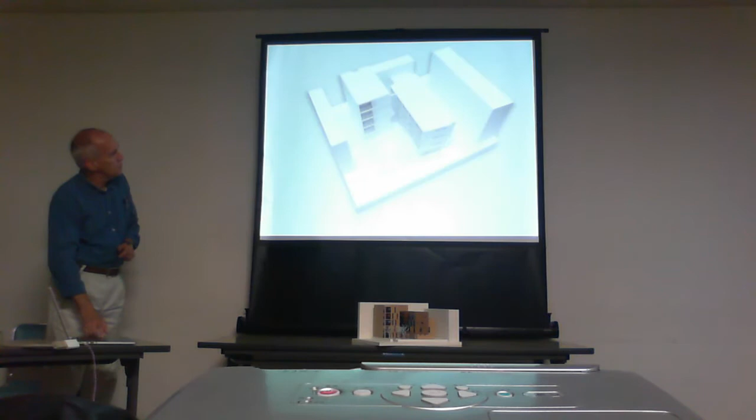I think what is good about this photograph is that it shows the basic moves to the design that support those two ideas of connection to nature and connection to the community.

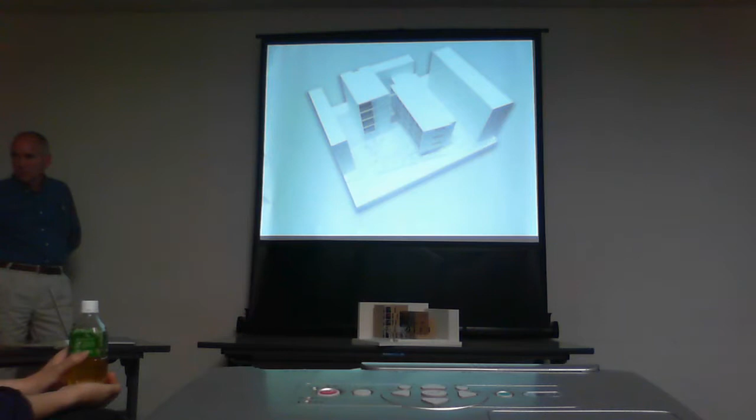After we did those basic moves, in terms of the way we thought about the detail of the building and how the building looks, we wanted the elevations, the fronts of the building, to be very stick-like, to have many pieces, so that when you walk by on the street and look at this, you would look at it through the trees.

The sort of parts and pieces of the building would sort of blend in with the branches of the trees, so that the scale, the size of the building breaks down just as the size of the tree breaks down because of all of the branches, so that everything sort of becomes blended together, and where the landscape ends and the building begins is kind of blurred.

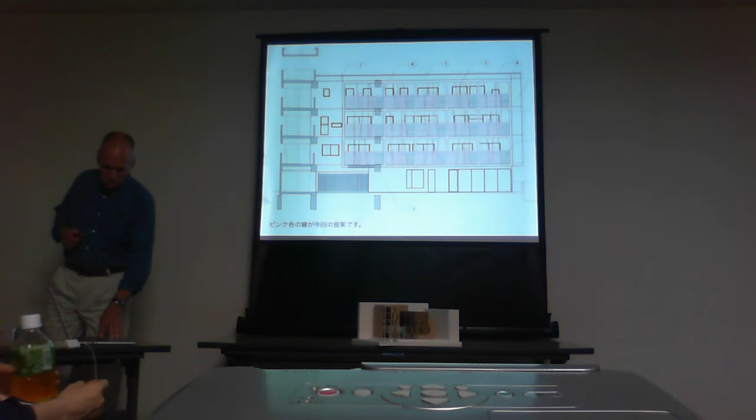I think we'll do one little detail. Before we go to that, there's one little detail I did want to mention on the railings. I think it gives you an example of how we're thinking about the details to follow through on the special quality of the building.

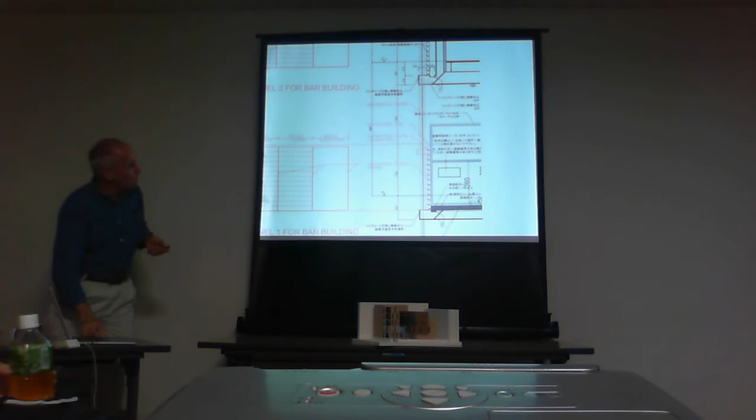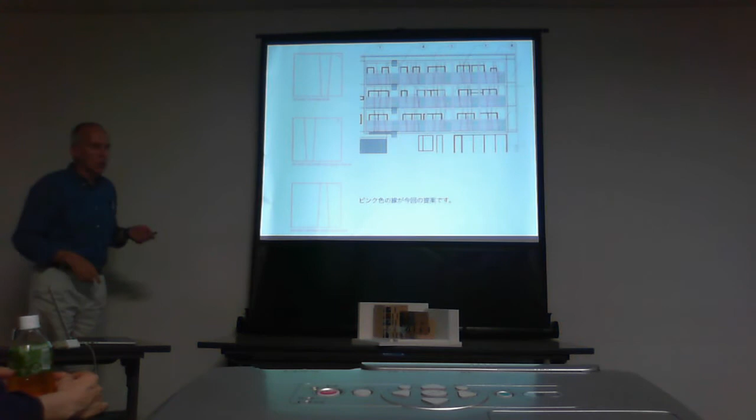On the louvers for the railings, we've designed them so they're very stick-like, but they conceal everything behind them, so on the elevations you can hang your laundry on racks, keep things on your balcony, and it won't be seen from the street. The way the louvers are angled blocks the view but still lets air come through, so from the garden your view won't be ruined by seeing laundry or stored things on people's balconies. I just wanted to point that out.

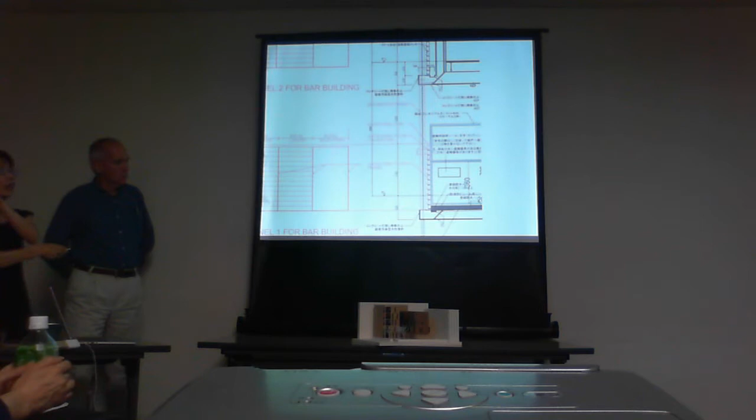So, there's one more small history lesson. There's another tradition that we brought into the building. As I was saying, we translated the building from an idea of exposed concrete to now being concrete with a color stucco over it. I think what's important is that this isn't an idea that simply came from nowhere. It came from a logic and understanding about a certain tradition and way of building, and in particular, a man who was very important in the history of modern architecture for Europe, and that importance came from his experience in Japan. And then I'll explain his connection with Gropius.

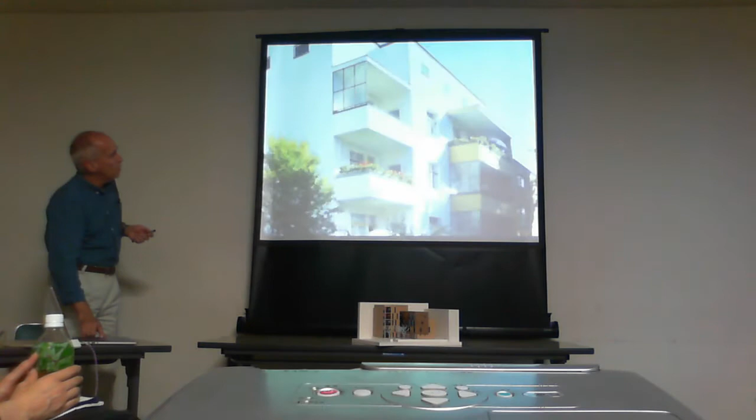Sometimes he used color in very simple, quiet ways, and other times in a very bright way. But the other interesting thing about his use of color is that he found colors he could connect to nature. So the colors aren't fashionable or trendy—they don't make you tired of them after five years. They have a timeless quality, and they're connected to the landscape. The way the building's color fits so well with the landscape really interested us, and we wanted to pull that idea into your building.

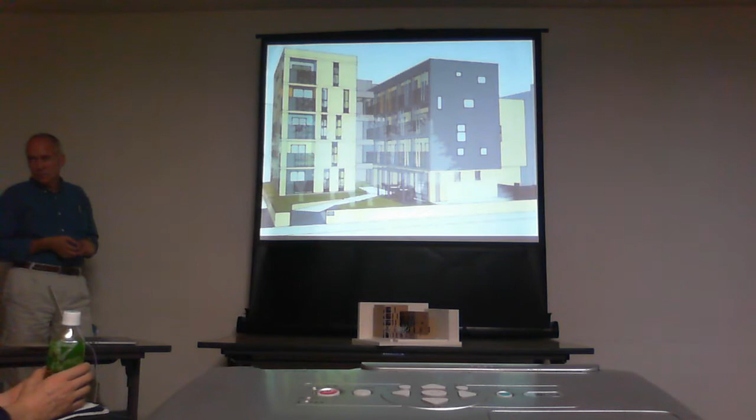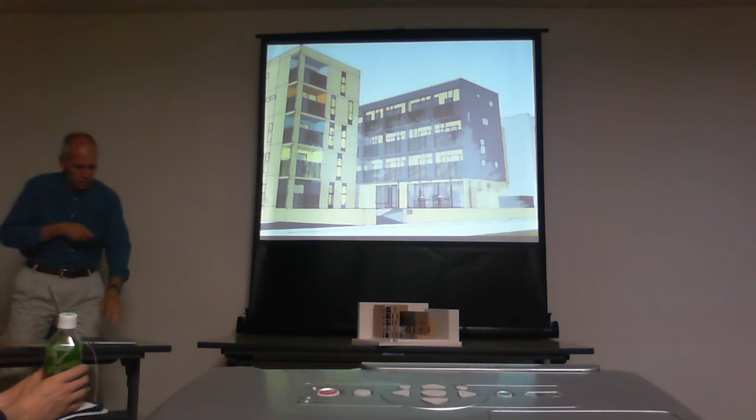Then the next thing we did was where we carve into this building for the units, we apply a palette of color within that spot—that's the color move on this portion of the building. On the next piece, we apply those same colors on the panels that sit on the balconies, and just as each of these colors identifies an owner within there, these colors correspond to the unit behind. That's how you get the mix of color.

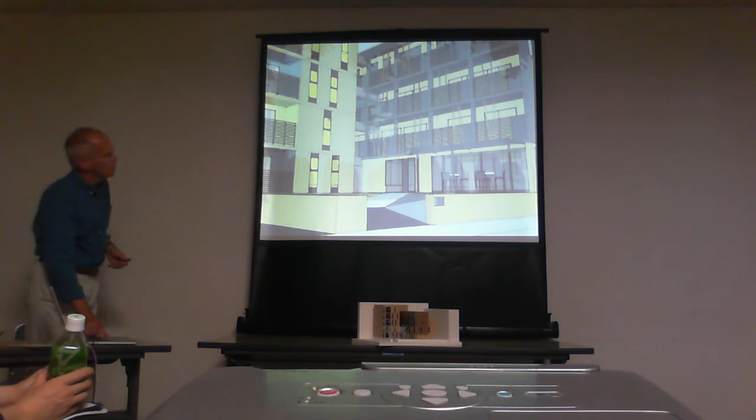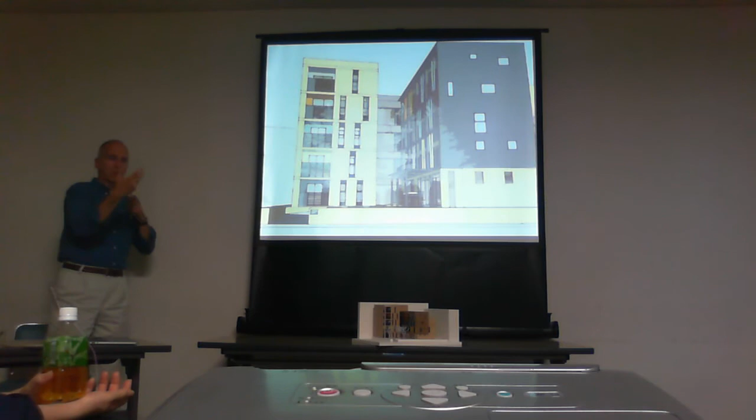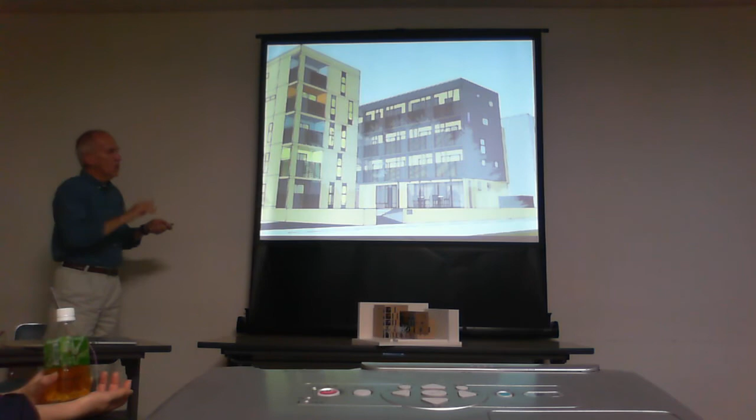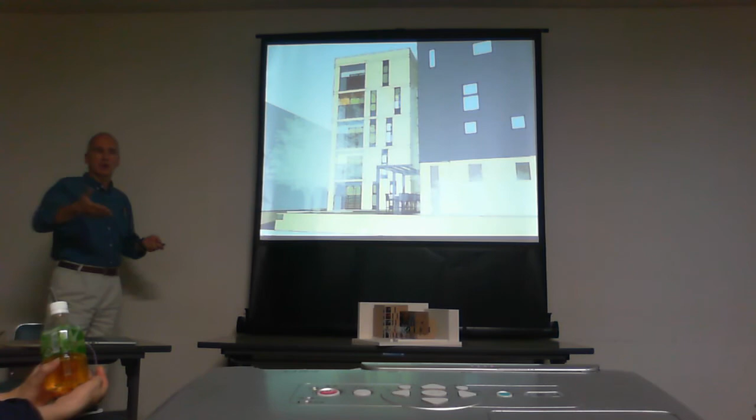The other thing about how we wanted to use color was that the more you move by the building, the more you understand it—you don't stand in one place and understand the entire building, but as you walk down the street, it changes as you go by. When I'm walking this way, I see these colors strongly, but not those. As I continue to walk, suddenly those colors come out as I look straight on. Then around the corner, the most important piece, in my opinion, is that you see the living room and the patio right at the street—that sense of community, greeting everyone who walks by.

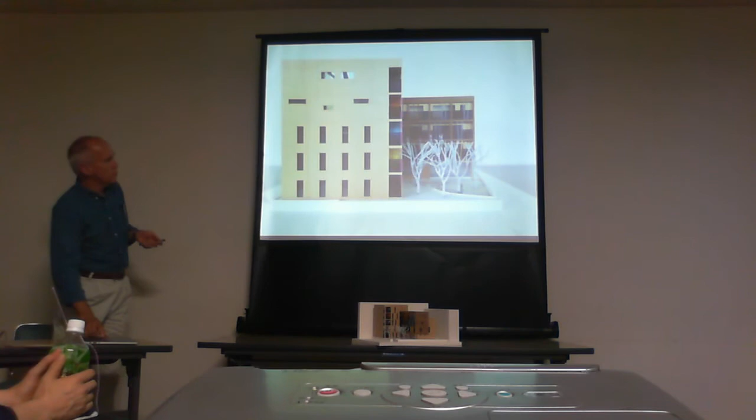So these are some photographs of the model itself. I think the colors read better on the model than in the computer renderings—more accurate. We wanted to show you these photographs to give some sense of the idea, so that as I walk down the street and look here, I see this elegant statement of color playing off the landscape.

One thing that's very important that we'll continue to work on is refining the actual tone of each color, because it's important that the color be timeless, so that after 5 or 10 years you can still look at these colors and find them pleasing—not colors that were fashionable in 2014 and suddenly unfashionable in 2020. It's also important that they work well with the landscape, like those examples with blue and powder, so we'll be testing the actual colors on site with samples to make sure they're exactly the right shade.

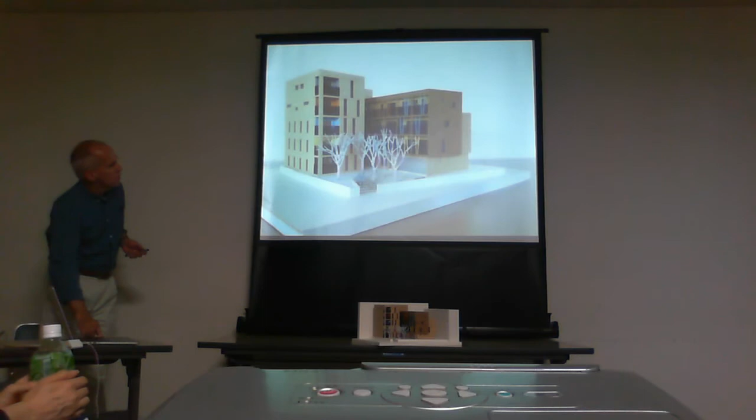That we can end the presentation at this point and be happy to talk about anything or answer any questions, whatever comments or observations people have.

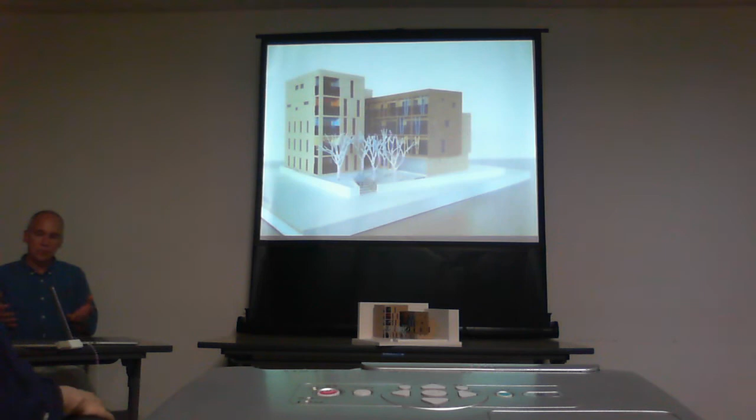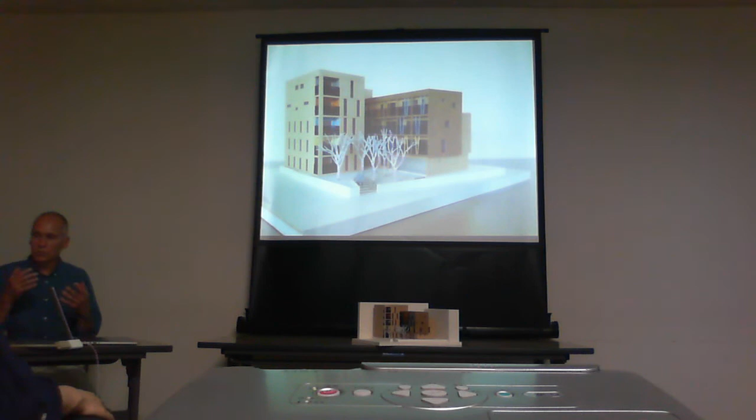Everyone understands that the building they're getting comes from two basic ideas about the landscape and creating a strong sense of community, and that the building also talks about a history—both the history of the site and the family that began this, but also ties itself into a larger history of architecture.

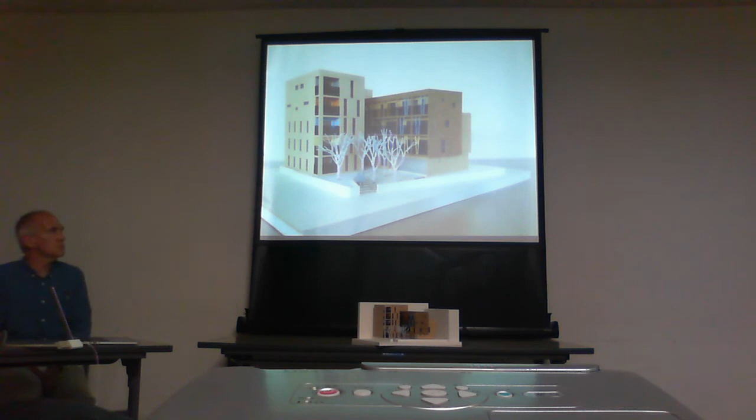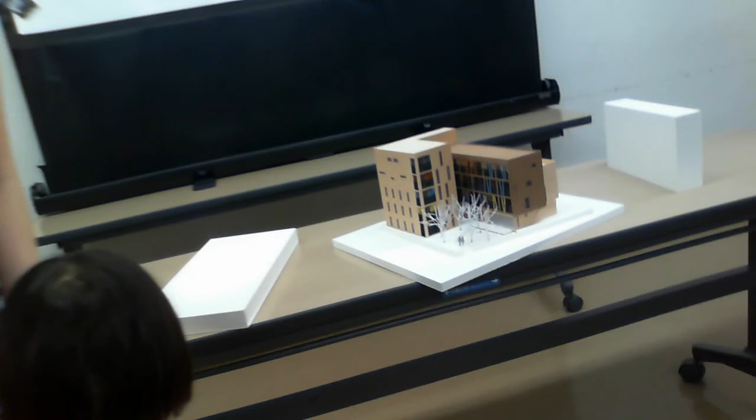近くで見てみましょうか。そちらの方が分かりよいかもしれません。もしよかったら前に出てください。いろんな角度から。前にいいですよ、いいですよ。はい、はい。結構狭い。